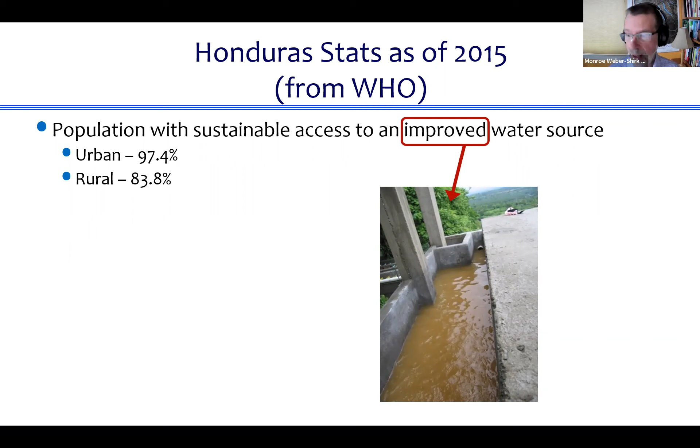And so you have to be really skeptical of language. In this case, improved water source included water that was in a pipe. So water that was in a pipe was by definition improved. And I'm hoping that you're thinking that putting river water in a pipe doesn't make it safe to drink. And so improved water isn't necessarily safe. So it shouldn't have been our goal. So that's an example of improved water, because that water was going to go into a pipe next and come out of somebody's tap. That's not what any of us want as our drinking water source.

And then here's another example of something that was definitely improved. This was a surface water source that was going into a distribution tank for a large town or city. And there was a tank of chlorine sitting on top of it. And there was a little valve put in the bottom of that tank, and it was dripping chlorine into the tank. And that was the extent of the water treatment. So this is at least one step up. They were doing one thing to their water before it was distributed.

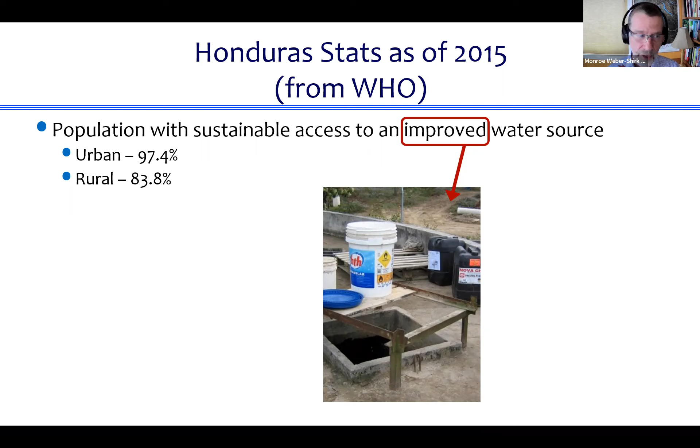To be fair, this picture is probably about 15 years old, and that situation has been remedied for that city. But there are many, many, many towns on this planet where water treatment is either non-existent or inadequate. So billions need safe water on tap, and the question is, how many really? So here's some estimates. About 2.3 billion lack access to safe and readily available water at home. And I put my little caveat in, this is Monroe's parentheses, where I'm like, yeah, we don't actually know that number, and maybe it's actually a whole lot higher than that, based on the fact that it's very easy to tell that the numbers have been way inflated for how good things are.

So let's take 2.3 billion. And then over the next few years, we're going to have an additional 1.2 billion in population because of growth. And that gives us 3.5 billion that will need treated water by 2030. And if you turn that into, and I'm realizing I should have updated these numbers. These numbers were from a couple years ago. And so the math might not work out if you use 2022 as your date. But it takes something close to 267 million people per year. And it's as if we were building water supplies for 18 New York cities per year. That's what it would take to meet this huge pent-up need and the need that's coming online as more and more people are being born, as the population is growing.

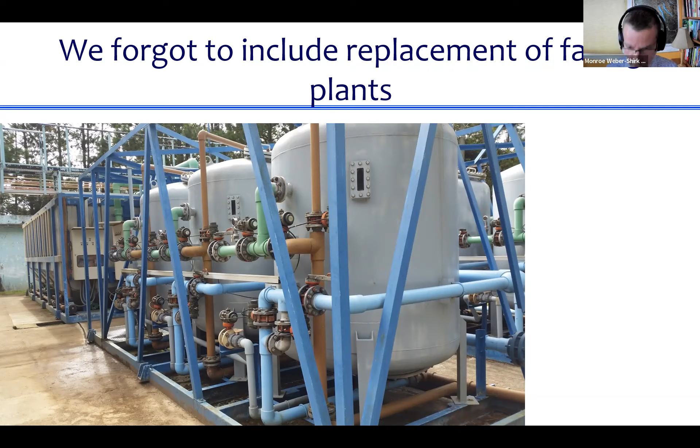And so now I'm, okay, I started out at 2.3 billion, I think, and then I got up to 3.5 billion. And then there's another thing that we should take into account, and that is that the water supply systems, including the treatment systems, have a limited life. And so the ones that have already been built, those need to be repaired eventually and replaced or upgraded. And so if we assume a 50-year lifetime, and now we got 8 years left until 2030, that means that 16% of existing plants need to be replaced, and supposedly 5.6 billion have safe water on tap. That's based on the total population minus the number that don't have safe water. And so I get another almost billion people that would need an upgraded system by 2030.

So I suppose if you're thinking, yesterday I was trying to convince you that you should become a business major, right? Remember? Now I'm like taking the other side and saying, but if you look at how much work is left to be done on providing safe water, it is one pile of work where the numbers are in the many billions. Here I come up with a total of 4.4 billion people who will need either new water treatment systems or new water supply systems or upgraded ones by the time we get to 2030, if we're to meet our goals.

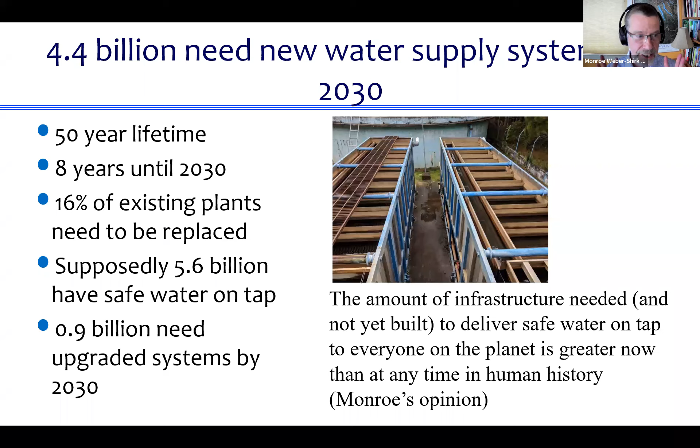And there's my Monroe's statement on the right, which is not based on any data. I want to be very clear. This is just Monroe making an opinion and wishing that someone would prove me wrong. Okay, so I'd happily be proven wrong in this, but my bet is that the amount of infrastructure needed and not yet built to deliver safe water on tap to everyone on the planet is greater now than at any prior time in human history. It's because population has been growing so fast and we've been doing such a poor job of meeting everyone's needs. I think the deficit of that infrastructure is greater now than ever.

Happily proven wrong.

You can have individuals in their houses collect some transparent soda bottles or water bottles, and they can put contaminated water in those bottles, and then they can set those bottles on the roof of their house, and they will get hit by sunlight, and the sunlight has UV light that ends up acting as a disinfectant. And so you can disinfect water that way.

You can chlorinate the water in your house. You can have a little bottle of Clorox with a little dripper on the end. And so you can drip chlorine into the water that you're going to use in your household, and you can treat it that way. Or you can boil the water, or you could run it through a ceramic filter and have the water treated that way.

And then getting into more centralized approaches, you can buy water, and there's a couple different ways that you could buy water. One is you could buy bottled water, and another one is you could have a tanker truck come to your house and bring water to your house. Have any of you been anywhere where you've seen tanker trucks roving the streets providing water to homes? I see at least one of you has seen that.

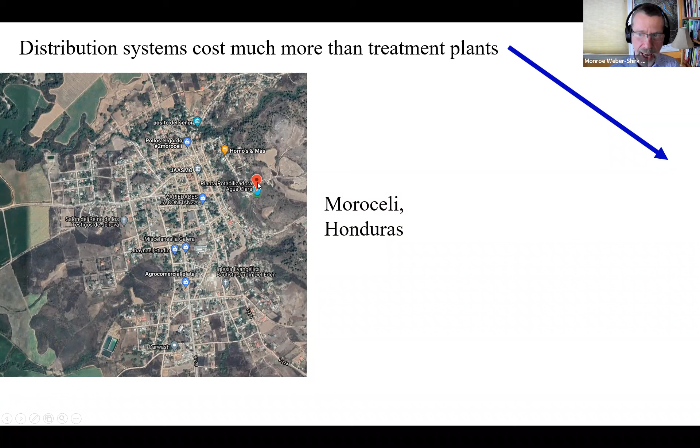And Moroceli has a water treatment plant, and you can see it under the little red dot there, except that you can't see it because it's covered up by the little red dot. So we zoom in a little bit and you still can barely see it, but it's right there. There's a tiny little building. That's the water treatment plant, okay?

But then zoom back out again and look at this picture of the town and realize that every street in that town has a pipe running down the street, and there's pipes going into each house. And the question is, does it cost more to build the pipe network, the distribution system that delivers water to each house, or does it cost more to build the water treatment plant?

And just by looking at the scale of the problem, your engineering intuition should be kicking in, and you should be saying, wait a second, there are miles and miles and miles of pipes. And then there's this one little building that's got stuff in it that's treating the water. And what I didn't show you is there's probably something like, I don't know, 15 kilometers of 6-inch galvanized iron pipe that's running from this town over to the river that they get their water from.

So the point here is that providing water on tap costs a whole lot. Treating it costs a little bit extra. I bet before you thought that treating it was the expensive thing. Or maybe you never thought about it. But the insight is treating it is actually not very expensive. And that changes how you think about everything.

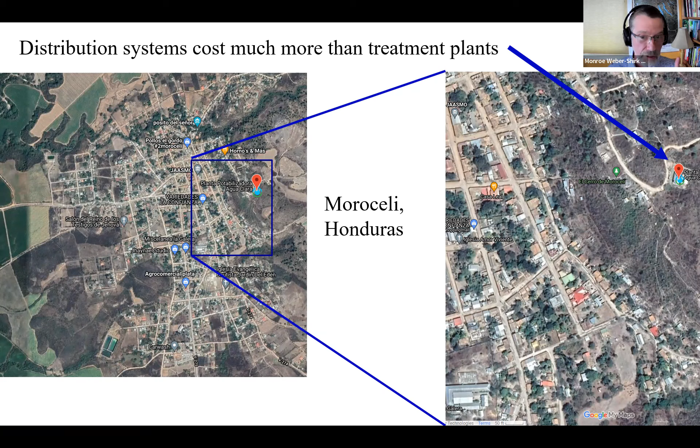Because if treating it isn't that expensive, then you have to think about this like you're running a business, and you want to make sure that your business is sustainable, and you are the water utility for a town. And you have an option. You can either provide your customers with river water that's untreated, or you can spend a little bit more and get a treatment plant, and then you can provide them with high quality drinking water. Which business model is going to be more successful? And to think about that, you need to think about how much people are willing to pay relative to how much it costs for you to provide that service.

And the key here is that people are willing to pay a whole lot more once you go from dirty water to clean water than what they were from going from no water to dirty water. So people really want water in their houses at all costs. But they don't want to pay a whole lot for dirty water. It's really hard to get up your excitement about paying a water bill for muddy water. But once you have clean water, you're willing to pay a lot more.

And there's also this whole sense of pride that comes of, hey, I live in a town where we have high quality water and my kids are feeling good. And I'm not like those other towns close by where they have crappy, dirty water coming out of their taps. So there's pride and there's willingness to pay for it. And that makes the entire water supply system so much more sustainable, because now the community, the water board or the water utility is able to charge more for their services than what they actually cost.

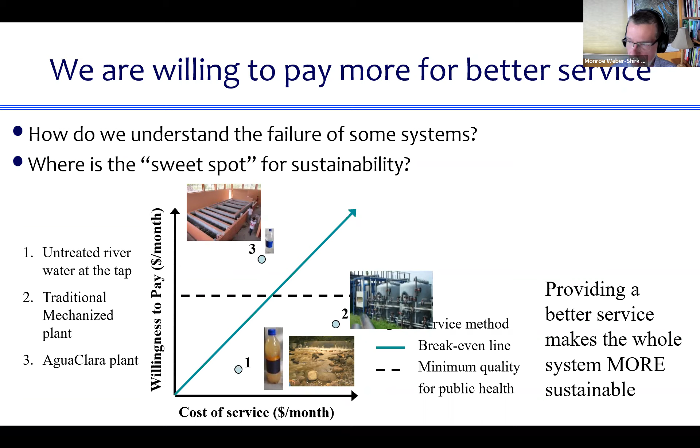So the conclusions from that: there's a misperception that centralized water treatment systems are a bad idea. I didn't talk about this, but I hear this, and I'm trying to figure out where I hear this. I think academia is one of the places where this idea comes out. There's this notion that centralized is just a bad thing.

And I fight back and say, wait, are roads and bridges and hospitals and trains also a bad idea? Do we not like anything that's centralized? And I'd argue that as a civilization, there are many things that the only way to do it well is to do it centralized. It has to be done by a community, by a group of people working together.

The capital cost of delivering water on tap exceeds the capital cost of treating the water by perhaps a factor of 10. So that's why adding the treatment on top of delivering the water ends up being a really good business model. And in order to be financially sustainable, drinking water suppliers must provide a service that is highly valued by their clients, by their customers.

Okay, now we're going to talk about failure. Intermittent supplies, the spiral to failure. So it's estimated that over 1/3 of the urban water supply systems in Africa and in Latin America and the Caribbean, and more than half of those in Asia operate intermittently, meaning that if you go turn on the tap, you may well get nothing. And then maybe there's a certain time of day when the water comes on, or maybe it comes on every couple days, or maybe it comes on once a week.

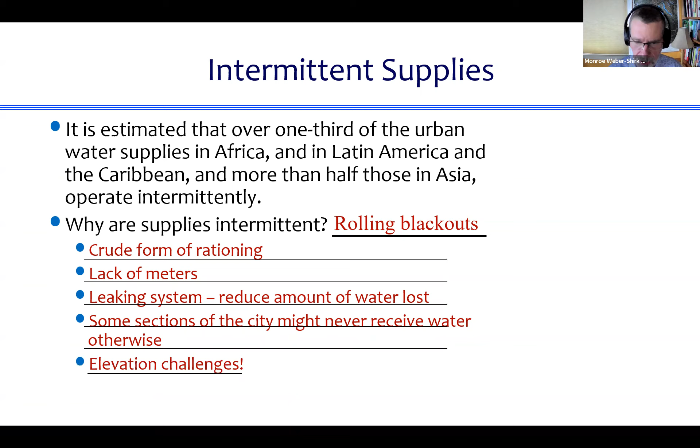So we've asked that question. Let's see. I'd like you to think about this, and I think we can do this by having you go into breakout rooms with about 3 people in a room, and I'll give you the context. I learned how we have to do this. I have to send you the questions in the chat before we actually get there. So I will figure out how to do that. And here that comes. So here are the questions. Whoa.

So the first one, we'll answer together before we go out. And then the one that I want you to think about is: water is intermittent, what do you do? But first, before we break up, what do you do if electricity is intermittent? So pretend you've just bought this hotel in Delhi, in India, and you're a business person, and you realize that in Delhi, the electricity goes on and off. So what do you do? Anyone, just pop in. What do you do if electricity goes on and off, and you've got a hotel, and you've got people who need to have air conditioning?

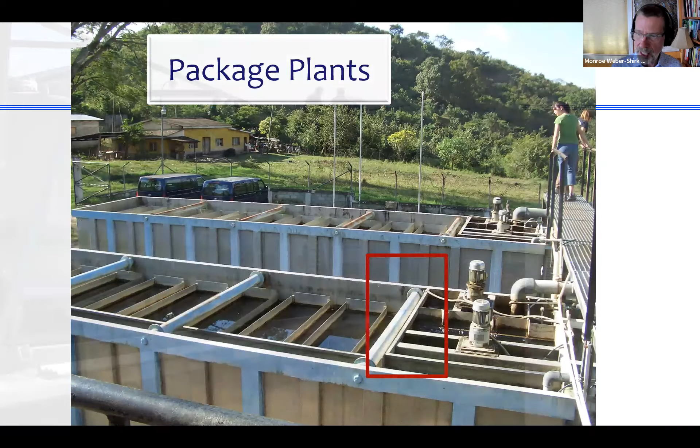Just a few fun photos, some package plants in Honduras, and pointing out, oops, my box mixed, but you can see there's motors hanging out there. Here's some more motors. And the reason that there's a pump here is because when they designed this, they said, put these 2 parts of the plant on a level spot. And so because it was on a level spot, they needed to pump the water from one section to the next. And so that pump runs day and night and uses a ton of electricity.

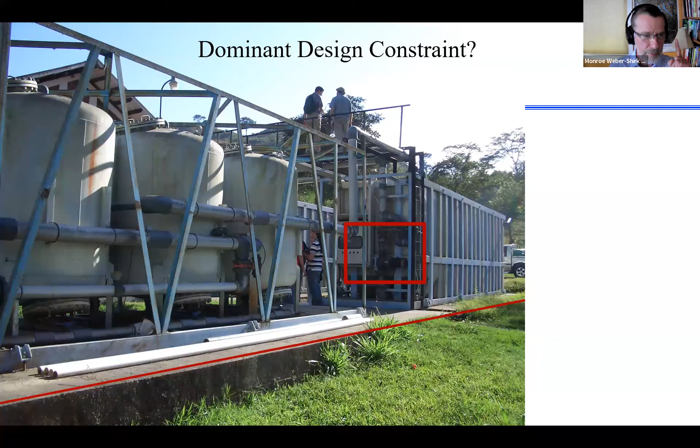And all they would have had to do is locate the filters just a little bit lower, a few meters lower in elevation, and then it would have worked by gravity and they would have eliminated that pumping cost. So we can use our brains and figure out how to make systems that are more energy efficient.

And then this is about designing for the operator. It's like, why did the operators need to build this ladder and need to use it to get access to the plant here? And the reason is because they didn't have adequate access to that tank from the ground level. And that's what they needed. So, and here's another one. This, believe it or not, I mean, you can see the person there grabbing hold of this handle. That is the access port into the bottom of a sedimentation tank.

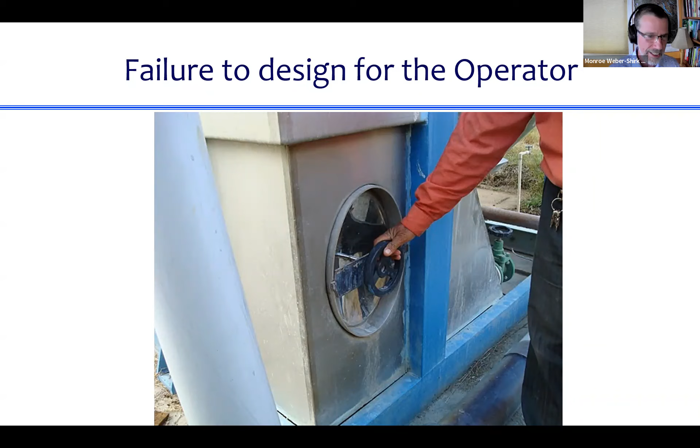And the reason that that access port is important is because that's where you have to go to clean out the sedimentation tank when it doesn't clean out properly. And so what you have to do is grease yourself up and slide through that hole to get into the tank. And I would argue that is not designed with the operator in mind. We should do better than having that sort of an access port to clean out a tank.